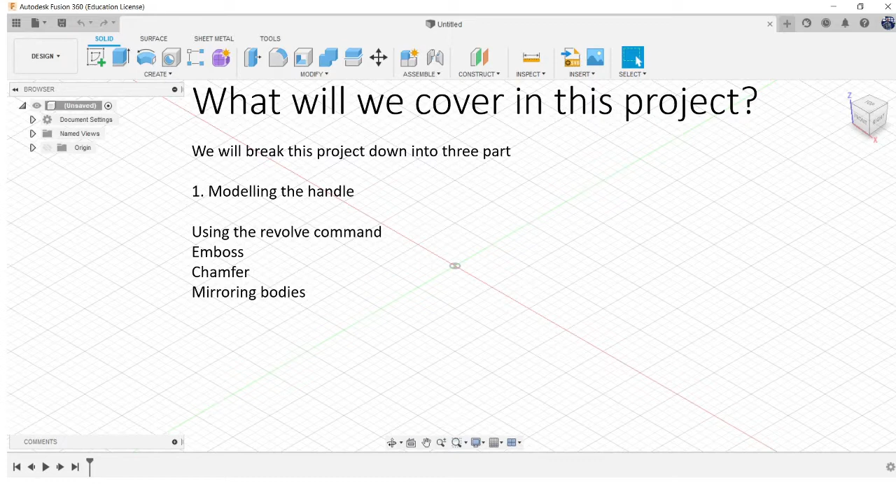reverse side. So just a nice little trick to use if there's symmetry in a model rather than modeling the whole thing over and over and over again. You can just do a little part and you can keep mirroring it over. It just makes your life a little bit easier, or a lot easier actually. So that's the first part.

Second part, we'll look at modelling the actual blade. Again, we'll look at mirroring, so we'll do a quarter of it, we'll mirror it across. Then we'll look at using the pipe command. And then the last little bit, we'll look at adding material to the model, combining the models from multiple files and to make things look more realistic, do a nice little scene, those sort of things.

So just for your reference as well, these are the reference images I'll be using. So the one in the middle is the canvas that I'll bring in. It's just taken off Google. So yeah, if you don't know, it's the Master Sword from a game series called The Legend of Zelda. The same theory behind modelling this would work for any other reference image you get.

Do spend time looking for a good reference image. It makes your life a lot easier. This even had measurements on it, which is like perfect. And then the other images are just there, so when I start to make it 3D, I can start to look at how really it should be looking as well.

Okay, so the first thing we're going to do is we're going to insert a canvas for our reference. Go to insert, and we're going to go to canvas, insert from computer, and I should have saved. Well, that's from a previous project. So sword modeling, and this reference image here.

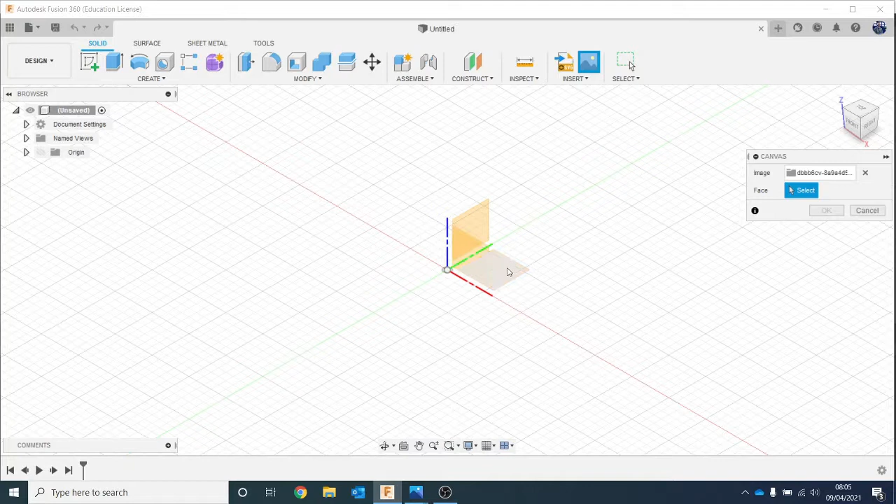Now it's up to you which plane you put it on. I find putting it on the front one is a little bit easier in terms of the camera. I did do this before and I did it on the bottom plane and it just made the camera a little bit more difficult to control. So I'm going to click on here and then hit OK.

And then what we want to make sure we do as well is just make sure, so we go to canvases on the left hand side, right click and calibrate. I'm going to zoom in. Now thankfully I found quite a good reference image that tells me the size it needs to be. So I'm going to click on the top, click on the bottom there, and you see it should be 3. And now it's back to front.

So actually, let's just do one thing first, let's escape that. Let's just edit feature. There we go. So flip it round. Now let's calibrate it just so we can read it. So calibrate. Let's click on the top and then the bottom, and it says clearly there. So this is in inches. So we're working in millimeters, but you can still put inches in.

So we'll do 5 and 1/8 inch, and you'll see that it's calibrated it, but it's done it in inches, even though we are in millimeters. So if you're in millimeters, just type in IN, or if you're in inches and then you type in mm or cm, it'll convert it for you anyway. Okay, so let's have a look.

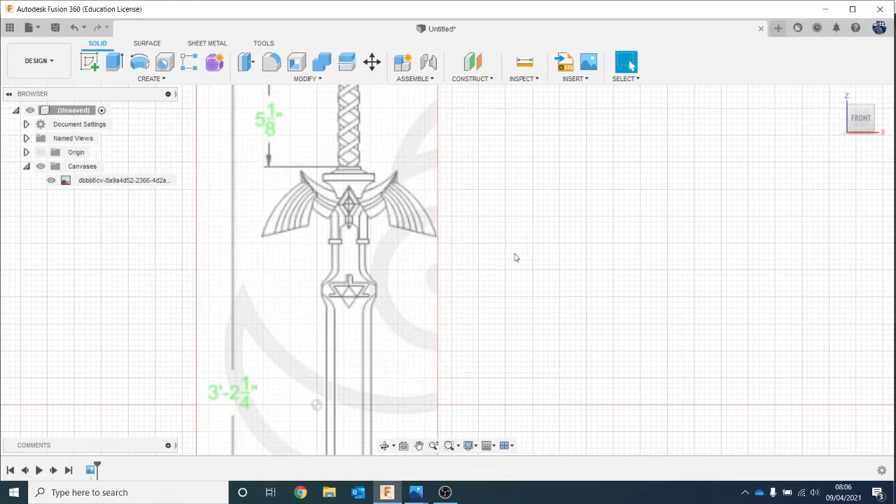So we're going to start with doing the handle first. So let's start by doing a sketch and pick this plane. I'm going to zoom in, and really what we're going to do, I think we're going to do a revolve for this first part of the handle, and then we'll end up modelling a quarter of the hilt to then protect a bit of the sword, and then we'll mirror them over.

So let's go on line. So L for line, I'll go to create a line. I'm going to go halfway, and let's bring it down to here.

Now it looks like it wasn't quite right, so I'm going to double click, move. I'm trying to make it in line with this little bit here. There we go. So that looks like that's much more in line.

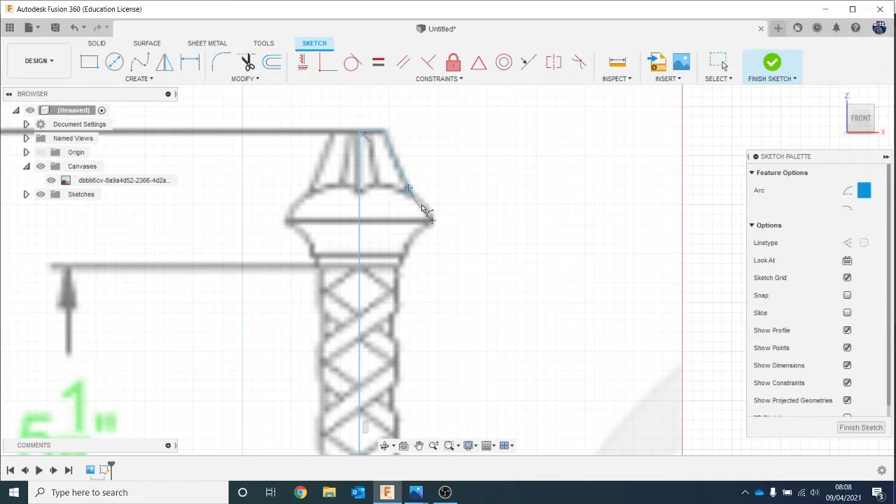Okay. And then what I'm going to do is basically use the line tool again and sort of trace over where it is. Now for this little bit here, I'll use the arc command, so I'll press escape. I'll go to create and arc, 3-point arc, so I'll click here and here, and then like that, and then I'll do the same. I'll do arc here, so I'll click here and just sort of adjust it like that. Maybe I'll add a little fillet so it's not very sharp.

Okay. Then we'll go back to the line command. So L on my keyboard. Let's come in a little bit. Now, obviously, the more you zoom in, you can end up making your reference image quite blurry, but we found a quite good detailed reference image, so it's worth spending the time trying to find as detailed a one as you can, because it makes your life a lot easier when you need to trace over things.

So there's a lot of zooming. This is why it's good to have a decent mouse as well with a scroll wheel. Okay, we'll go back to the arc command. Let's go to create an arc. Annoyingly, there's no keyboard shortcut for arc. At this point, that, and then we'll just finish it off. Go to line, come straight across here,

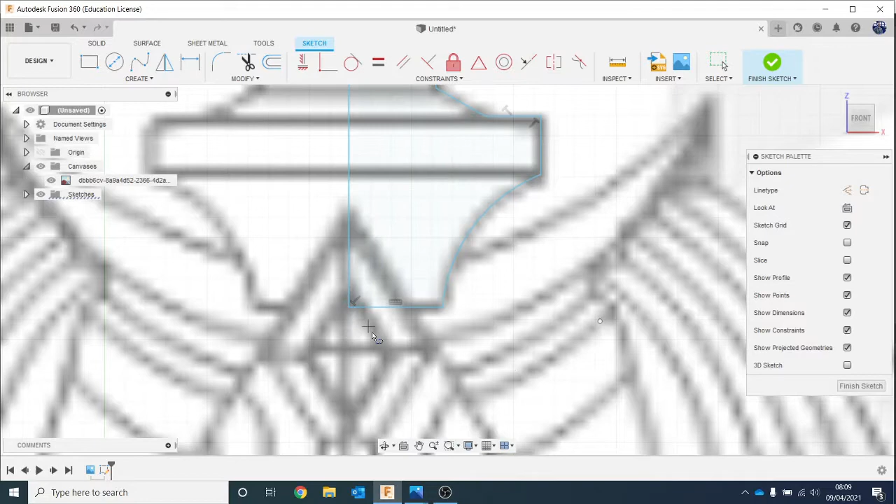like that, and then when you click over it, it should go completely blue, because that means it is a closed profile. If it doesn't do that, it means there's a little hole somewhere in your profile. So we're going to go to finish sketch, go to revolve there, or you can go to create and revolve, and it should automatically select the profile you want. If it doesn't, click it. Then the axis is that middle line that we did, like that, and hit OK. So you can see if I turn my canvas off, we've already started to get the basics of our handle done. So put our canvas back on.

So now let's just flip this around, so we're working it this way around. Again, we're going to start a sketch. In fact, before we do that, we're looking at it from this side, and we want to start a sketch right in the middle. So just to make our lives a little bit easier, I'm going to go on construct and then go on tangent plane. I'm going to click on this side. Okay, so I've made a tangent plane there. I'm going to do the same on this side. Tangent plane.

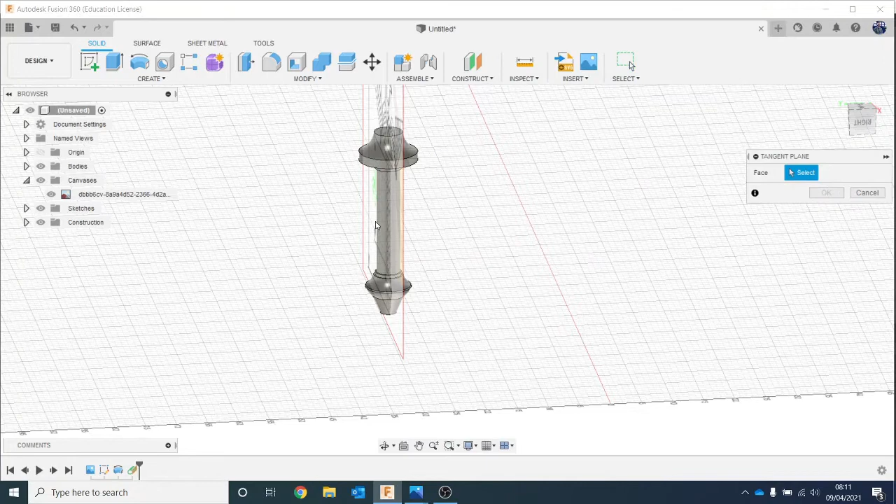Like that. And then I can just click on a mid plane, so I'm now going to be right in the middle. I'm going to go to mid plane, click on that plane, click on this plane here, and now I've got a plane that's going straight through the middle, so I can get rid of this one. I'm clicking on it and pressing V on my keyboard, and the only reason I did that was just so I know I've got this plane that I can draw on perfectly that's right in the middle.

Okay, so I'm going to go on create sketch, select that plane, and the same sort of thing. I'm just going to go around and try and trace the outline. I'm only going to go up to this part here first of all, and I'm only really going to do this left hand half because we're going to mirror it over, and then we'll mirror it on the back as well. So we're actually only really going to do like a quarter of the work. Okay, so I'm going to hit L on my keyboard. It doesn't really matter where we start. So let's start from here and let's come up.

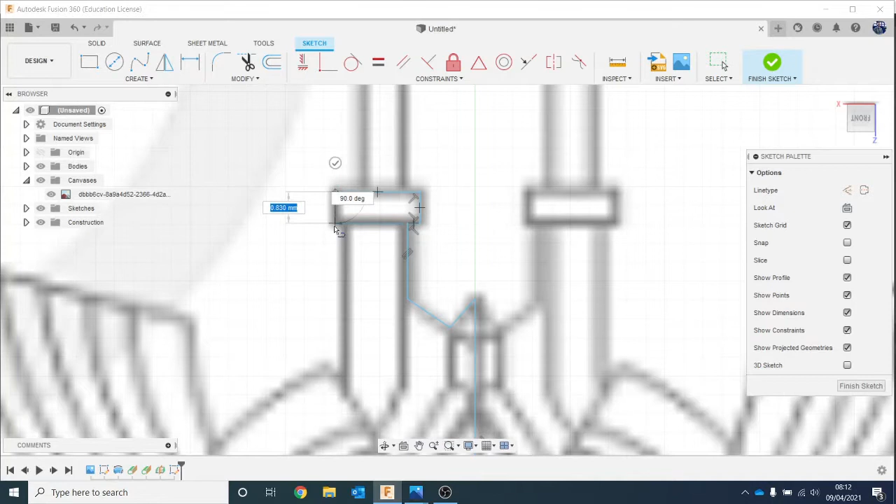And all we're doing is just going around tracing the reference image as accurately as we can. If you don't match it up perfectly, it doesn't matter, obviously, because you're just using that as a reference. You may end up changing it slightly if you want to as well. That's absolutely fine.

So we've got those bits done. So now I think we're going to have quite a bit of using the arc command here. So let's go to create and arc. Let's do there to there.

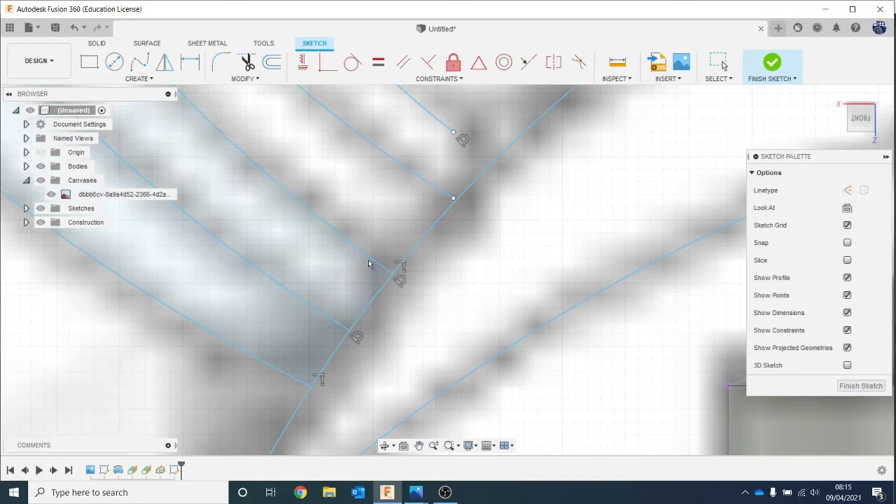And you can see it's become a closed profile now because once I click on it, it will start to do that, whereas these ones aren't at the minute. So I'm going to go back to extend and just work my way around. Those are all now closed profiles. This one isn't yet. Let's extend that as well. Let's go to create, or no, modify and extend.

Okay, and then we'll do the last few. So to create arc. I'll just finish off the line command. I should now have, just double check everything that I've done is now a closed profile. Looks like it is.

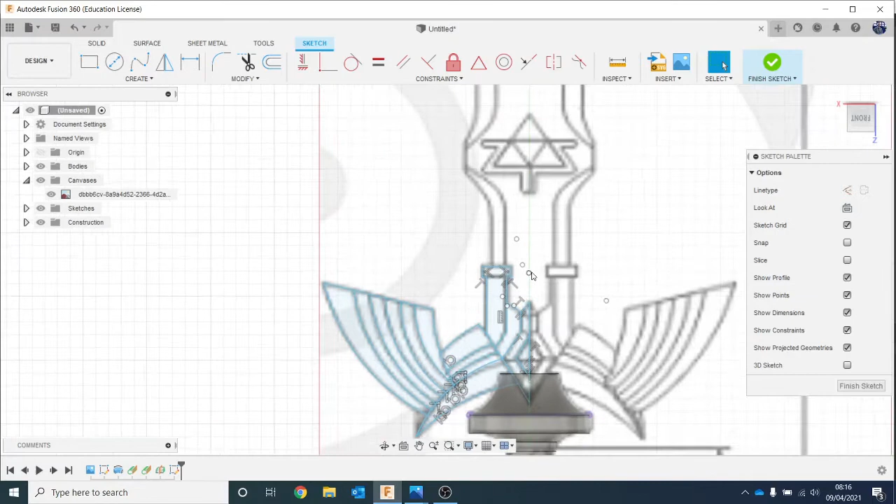Okay, so now we're going to have a go. Not finished yet. I'm sort of extruding those up to make it look realistic. So I've got a few of the reference images. So we've got the canvas that we've got in, so you can see what it's meant to look like there. But I've also got a few reference images here, so I can look in a bit more detail of how they'll end up looking. So we've got that one, and then we've got the whole thing there. So what we're going to do,

okay, is we're going to go E for extrude. I'm going to click on this side, and then I'm going to click on the side and start to drag it up and see about where I reckon it should be. So I'm going to extend it out a little bit, and I'm going to go to symmetric. It does the same on both sides. But no, I don't want it to be symmetric because I'm going to mirror it. So I'm going to do one side. I want it to protrude a little bit beyond this part of the handle, just so it has a little bit more protection.

Okay, and we'll just, like that. And so no new body. Go okay. And we're going to do the same for all of them. So we're going to click E. Oh, so our sketch has just disappeared. So we're going to go to the left-hand side, to sketches. Click this one here. Click on E. Click on this profile. Now we could drag it up again, or we could just click on this surface and

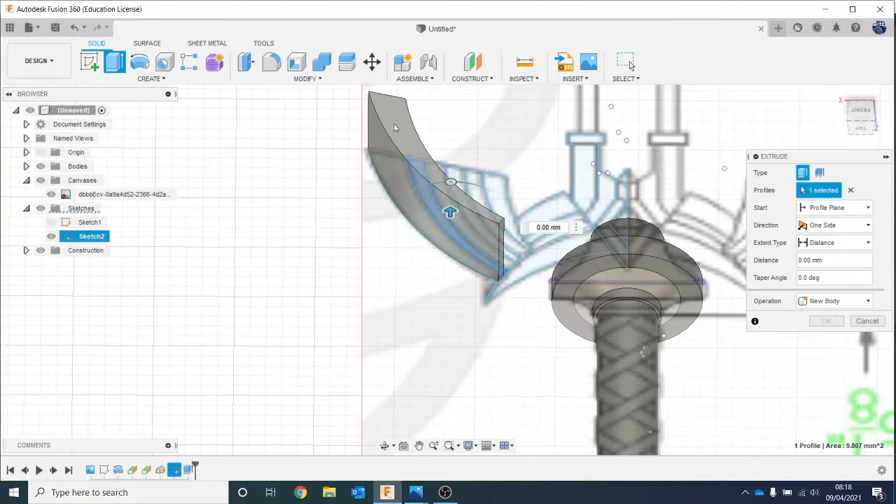it'll jump it up. But you've got to remember it's going to try and join it. We don't want it to join yet. We will join them together, but not yet. We're going to do a new body. And you can see it's a new body now because there's a line in between the two of them. And that's what we want, because we will join them together, but we want to add a chamfer and things to it before we do that.

Same again, E for extrude, bring it up, new body. Same again, E for extrude, click on that height, new body, and just do the same thing for all of these little profiles. I'm just going to keep looking back at my reference image here just to see how it should look.

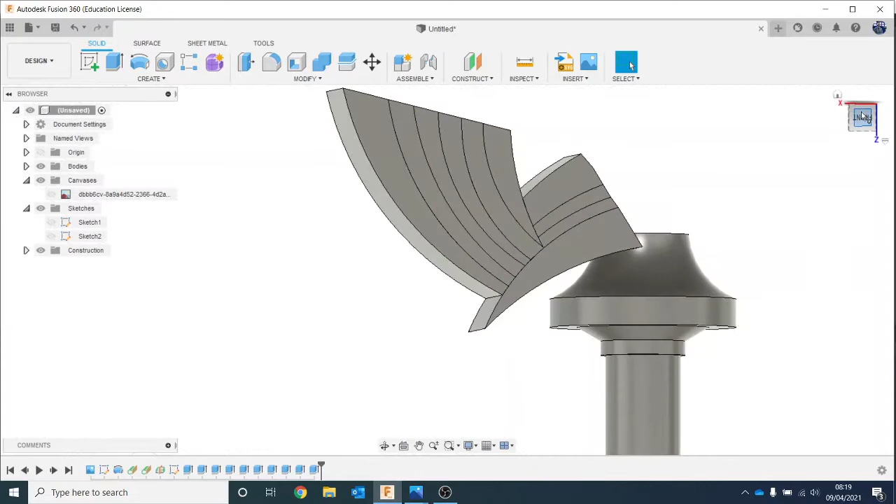Okay, so I'm just going to turn my canvas off a second so you see sort of what we've done. So we've extruded it up a little bit. So obviously that's not the shape it is, that's the overall outline, but if you look at those images, we've got a little bit more like a chamfered edge to them, so that's what we're going to add to it, which is why we didn't join in the first place. So we'll go to modify and chamfer, look at this edge and drag it in a little bit.

Control, click on the same side here. Let's bring it back a little bit. Like that. Click OK. And let's do the same on these other pieces as well. So let's go to modify and chamfer. Oh, I clicked the wrong part. Let's go to modify chamfer.

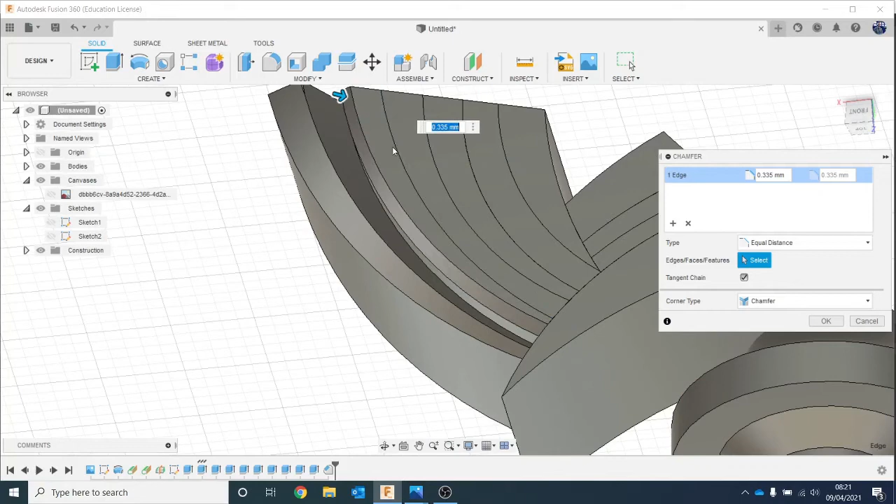So this edge, this edge. That's not the edge I meant to click. There we go. Drag it in a little bit. Click OK. See how it's starting to look. Quite nice. Same again. Modify, chamfer.

Okay. Last couple. So what I'm doing is trying to select. So there's two edges there. I'm just holding down with my mouse so that I can pick through, and it's normally the second one. But that might not always be the case. So in that instance, it wasn't the case. So we'll cancel that. We'll try it again.

We'll go to modify, chamfer, and that edge. Go with that edge. Okay, so I had the surface selected there as well. So let's try that again. Let's modify, chamfer. So I just want that edge. This edge. There we go. That's the right one.

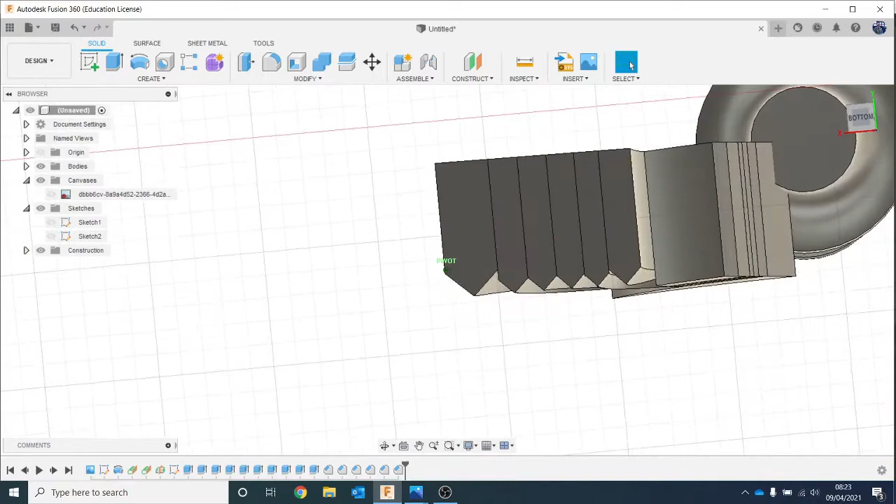So then I'm going to add some chamfers to these parts as well. So we look back at this reference image. We'll add some chamfers along here. So let's have a look at doing that. So let's go to modify chamfer. Okay, I might have gone a little bit too far. Let's have a look. Yeah, that's probably a little bit too far. So let's not select that surface first.

Let's go to modify chamfer. Let's just do this side first. Let's leave it like that. I think probably fine. Yeah, that looks better that way, I think. Then let's just chamfer these parts. Oh, wrong edge.

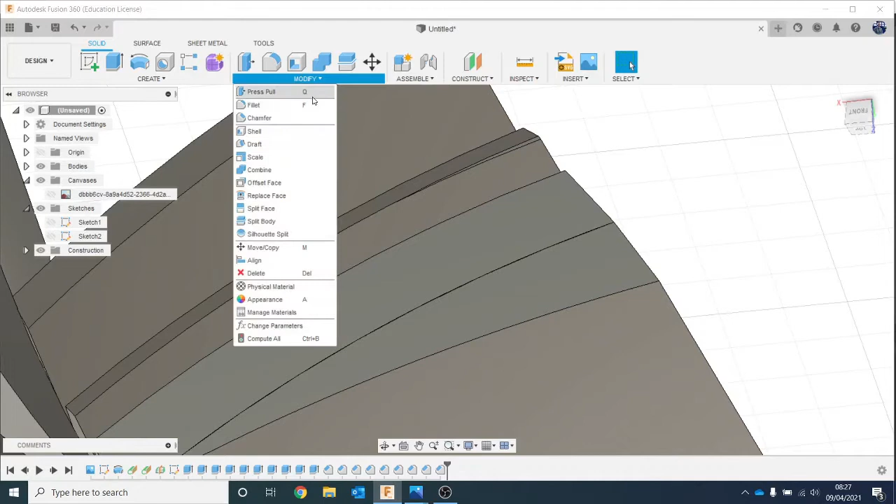No, don't want my surface. Want that edge. Oh, wrong edge. Can be a little bit fiddly sometimes to make sure you get the right edge selected. Come on. There we go.

And then the last little one, we'll chamfer this bit here. Right in. Like that. Okay. So we have a look and see how it's starting to look. Quite nice. Let's compare that to the original. I'd say we're not far away.

Okay, excellent. So now we'll start having a look at the little bit here in the middle. So let's have a little look at that. I'll put our canvas back on. So yeah, we'll put our sketch back on as well, because we've already got that, so we can start on these little bits as well. So let's have a look.

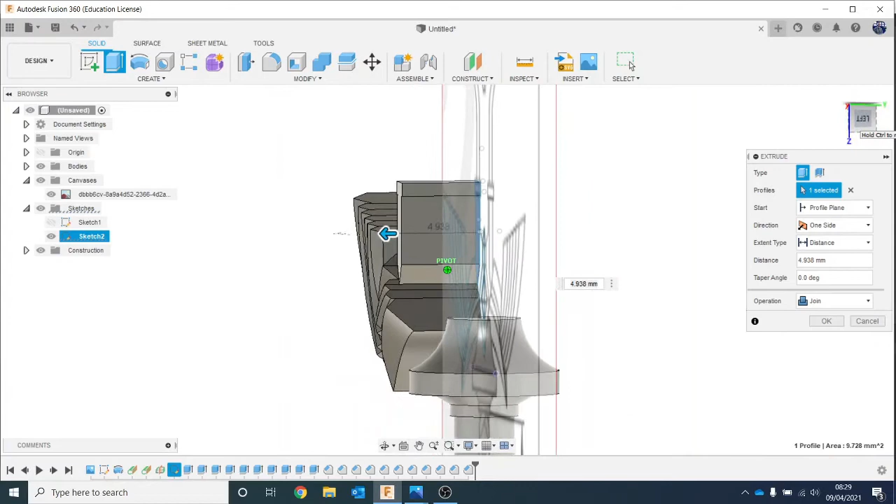Okay, so let's select profile, E for extrude. And then let's bring it forward a little bit. Bring it to about that height. Okay. And then let's do the same for the other profiles. So bring it up to there. I'm going to change it to new body. Again, new body. E up there, and then new body.

Okay, perfect. So let's turn off our canvas so we see what we're doing. So same sort of thing as before. We don't need our sketch on anymore. So if we're looking at our reference image, let's see what kind of thing we're doing. So we're going to do a little bit more chamfering, and then we're going to mirror the whole thing over, I think. So let's have a look. So let's start with chamfer.

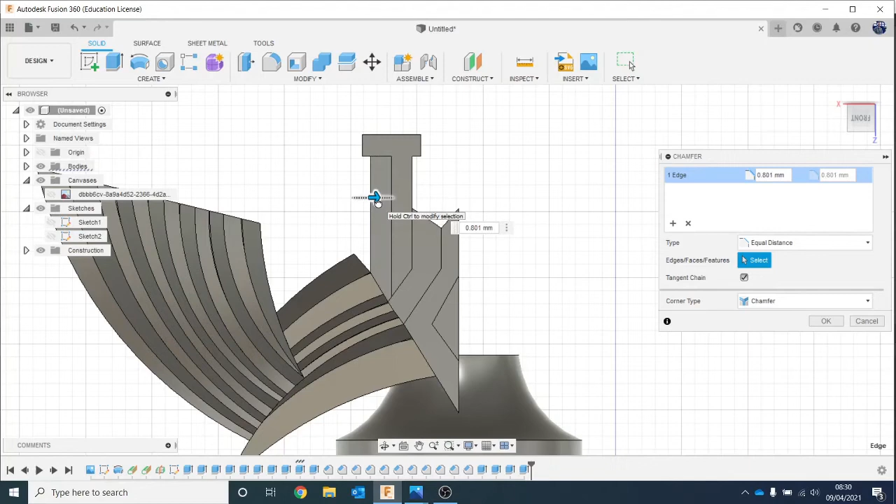I'm just going to keep flicking back and forwards towards our reference image. And we're just trying to make things look as right as possible. If you're trying to do it and it doesn't look quite right, you can always just alter it a little bit as well. Okay, let's then have a look. Go back to our reference image. Okay. Again, let's go to chamfer. Okay, so it's chamfer.

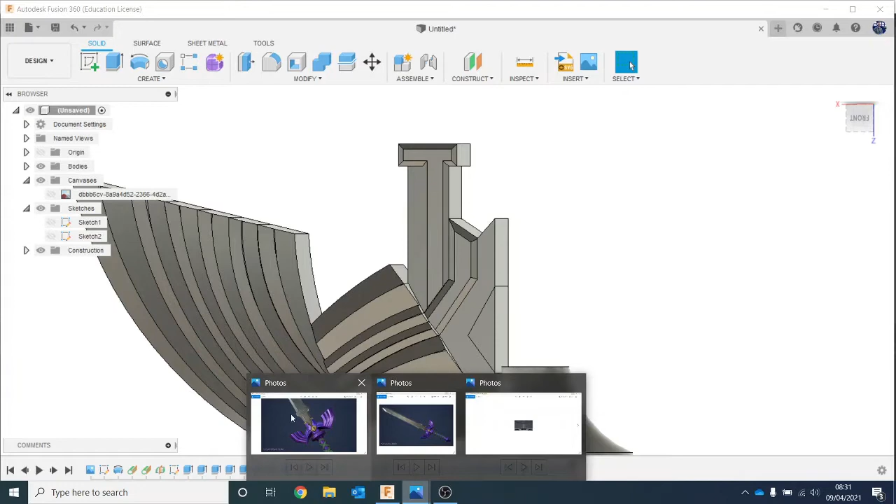Again, the last little bit I think we have left to do is just this little diamond shape in the middle. So let's just have a look how that's supposed to look. Okay, so let's do modify chamfer. Excellent. And then the last little bit we'll do in the middle. So go to modify and chamfer.

Like that. So basically, we've only done a quarter of it, so we're going to mirror it on the right and then the back as well. But that's sort of what we're after doing. So we've done quite a lot of work on this little detail. So there's quite a lot of detail to it. And we did it all as separate bodies. So now what we're going to do is we're going to combine all of these together. So let's actually just find out. So that should be our handle, I hope.

There we go. Okay. So now, as you can see here, we've got all these different bodies here, which can get a bit messy. So we're just going to combine them all together. So I'm going to select them all, go up here, go to combine. Okay, and you'll see now that they disappear. So now it's all one solid body. So then we'll have a look at mirroring it and then start to add some more details to it as well.

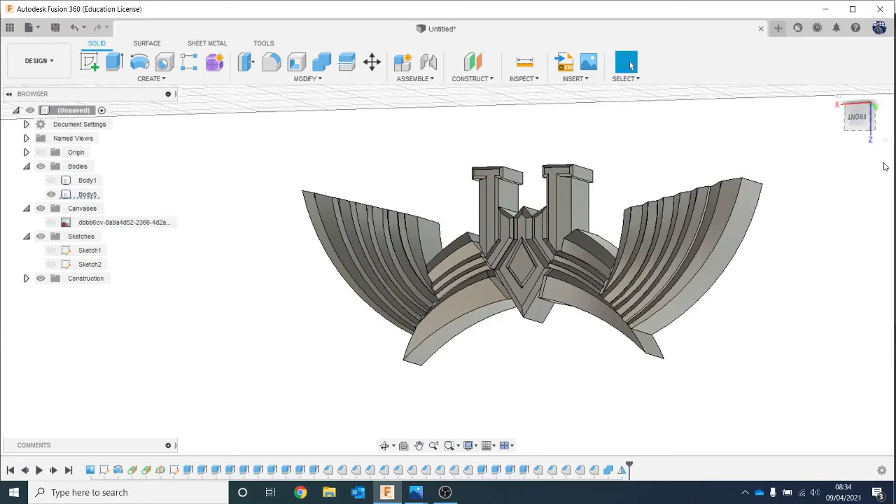Okay, so let's turn this body off here. So we've just got this one. So we're going to mirror it. So we're going to go on create and mirror. So type, we want to mirror body. So I want to mirror that body. Mirror plane, I can just rotate around and say along there. Hit OK. It can take a little bit to load, and you can see straight away already we've now got our perfect left and right.

Now obviously we want to do the same on the other side. So we'll do the same. We'll go to create and mirror bodies, mirror plane. Because it's a flat edge, we know we can just do it that side there. Hit join, hit OK. We've now got our top bit. So we spent quite a lot of time just doing 1/4 of it, but then it was nice and easy because then we could just mirror it all across. And then we've got our handle that goes straight down the middle, nice and proportioned that way.

So let's just combine all that together. So let's go to combine this body and this body. Hit OK. So we're not far off to having the handle done, which is definitely the most detailed part of what we need to do. So if we have a look at our reference image, there's this sort of lattice pattern going along the handle, and it was on our reference canvas as well. So we're going to do that with Emboss.

So just quickly, I did this before and then I didn't try it to see if it works. I thought of a new idea of doing it. So I'm going to go to inspect and measure, just out of curiosity. Okay, so what I've done is here, I've gone to inspect and measure to try and get basically the circumference of it. So I'm going to just try and see if this works. Right here, loop length, I'm going to click to copy to clipboard.

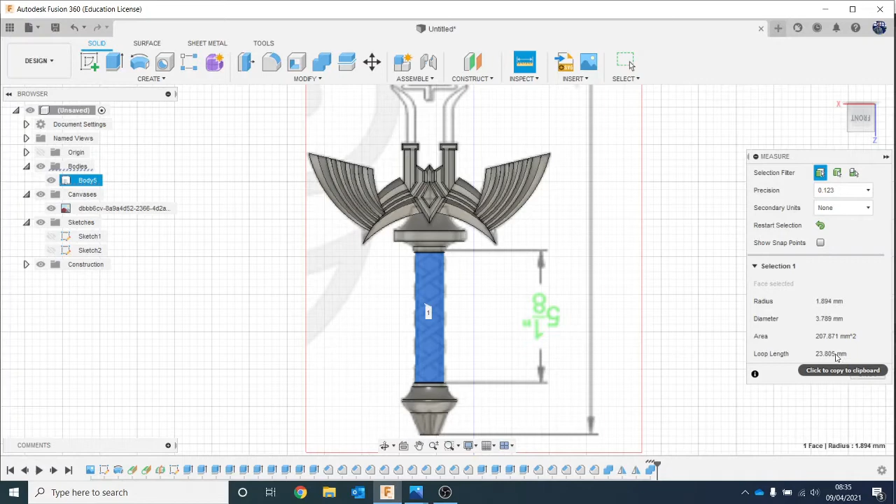I'm just going to click on that and close, because now I'm going to click on sketch, and I'm going to click on this plane, and I'm going to rotate around, and then I'm going to start sketch, like that, click on D for dimension, and I'm going to paste in the length, because hopefully that means it will wrap around. You'll see what I'm going to try and do in a second. Okay, so that's the length. That may not work, so we're trying it out to see. Just maybe a slightly better way of doing it.

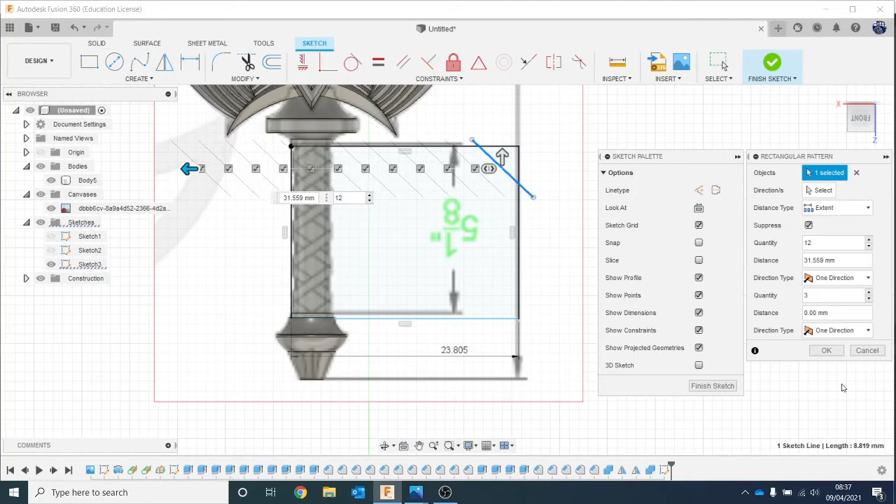So what I'm going to do now is basically try and just do like a freehand lattice type pattern. I'm going to line. I'm going to start coming across like that, and then I think what I'll probably do is go to create. Let's go to rectangular pattern, and let's put those numbers. Let's try like 10. I'll extend it outwards. Do a few more. 12. Okay, and I'm going to use our extend command that we used before, just to extend it so it goes to complete that whole profile.

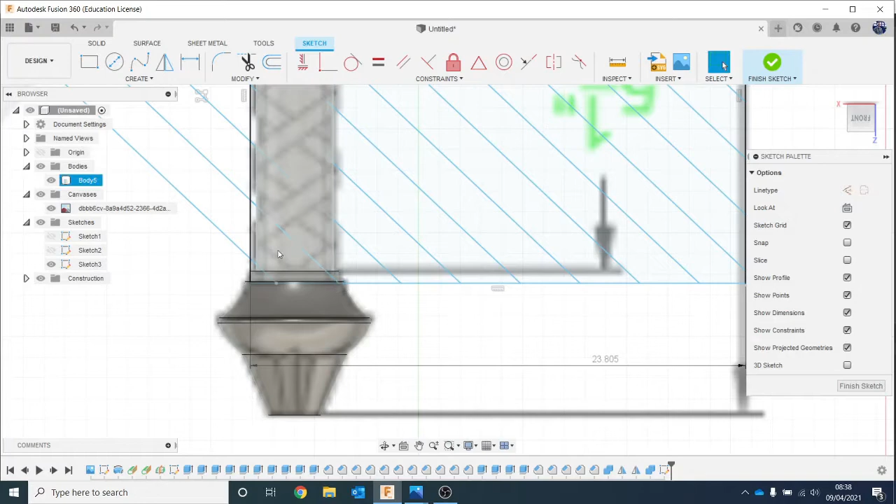Okay, I think maybe let's add in one more extra line. So let's see if I can go back and let's try create rectangle pattern. Just drag it once more there, so okay. Hide this body a second. Okay, so now I can see I got this profile. I don't want that line, so let's just delete that bit. Okay, so I've now got all those profiles along there.

Now we'll have them going the opposite way. So let's see if this works. Let's select all of these. I'm going to hold down Shift, select all of these. Just the lines, not the profiles for now. And I'm going to do Control C, Control V. Then let's rotate them 90 degrees. Bring them down. Okay, and then I'm going to do the same thing. I'm going to extend these a little bit. So now you can see I'm getting these little patterns that I was after. So I'm going to modify, extend.

So it seems like we're doing quite a lot of legwork to try and get this pattern equal, but I think it probably just makes it a lot easier than if we were to try and freehand it, so we know it's all going to line up. And hopefully the thing I did before with the measuring has worked well, otherwise I'll cry. Let's give it a go.

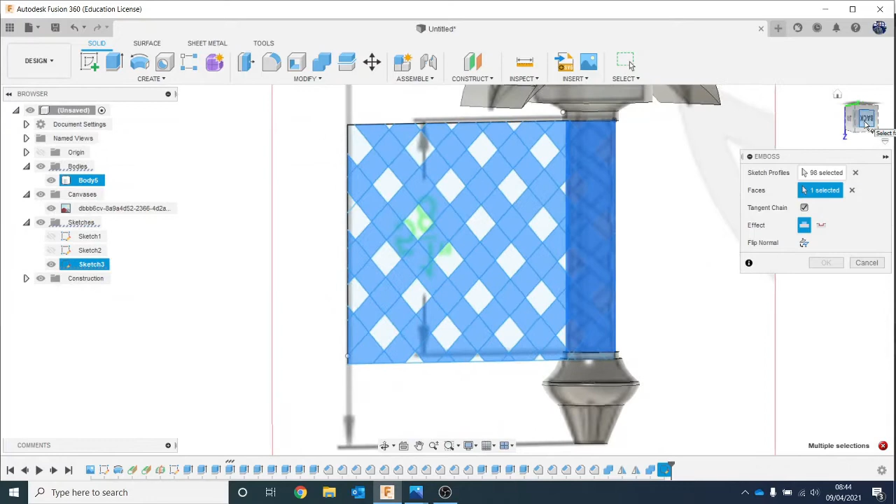Okay, so what it's saying there is the error, because that's what I was trying to avoid, because last time I did it, that's what happened as well. But it's not a big thing. So if I look at this error here, the sketch profiles create intersecting body. Basically, it's saying that this bit is too long to wrap around, which is what I was trying to avoid, but it's not a big thing. Basically, we're going to do a little bit of trial and error now. So let's go to edit sketch, and I'll do it shorter first, just so you can see what I'm talking about.

So I'm just going to come down here, come finish. Same again, let's try emboss. So now I'm just going to do it up to that line and see if that works. It's a little bit of trial and error. We tried it, it didn't really work. Probably should have tried it before doing the video, but the idea just came to me as I was doing it.

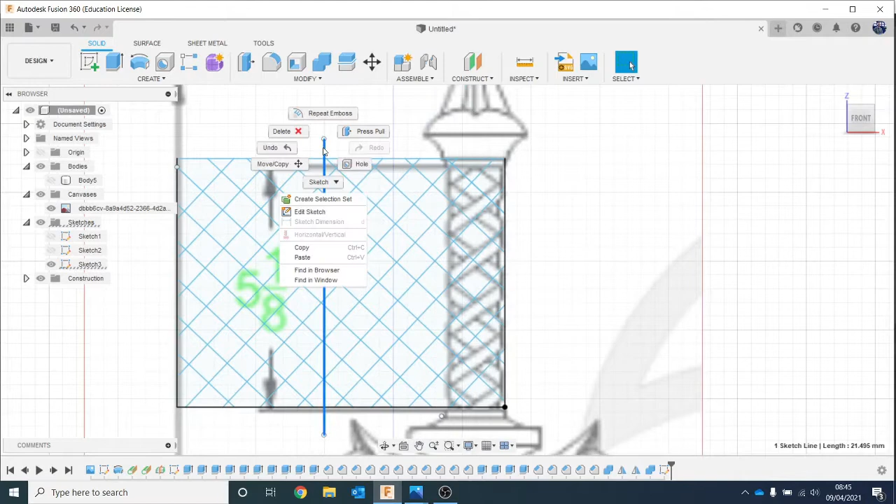Faces, body back on. Okay, still not. So let's move this way a little bit more. Let's just try that again. Oh, no, wrong profile. I don't want those ones. I want these ones.

Okay, so there you go. You can see that's wrapped around. And obviously I've got a little bit too short, so I can actually make that. So let's change this depth. Let's change it to like 0.5. Okay, so you can see it's wrapped around. It's got the effect that we've wanted. I'm going to change that a little bit less. Let's try 0.2. There you go. That's much better effect. But you can see that it doesn't match all the way up.

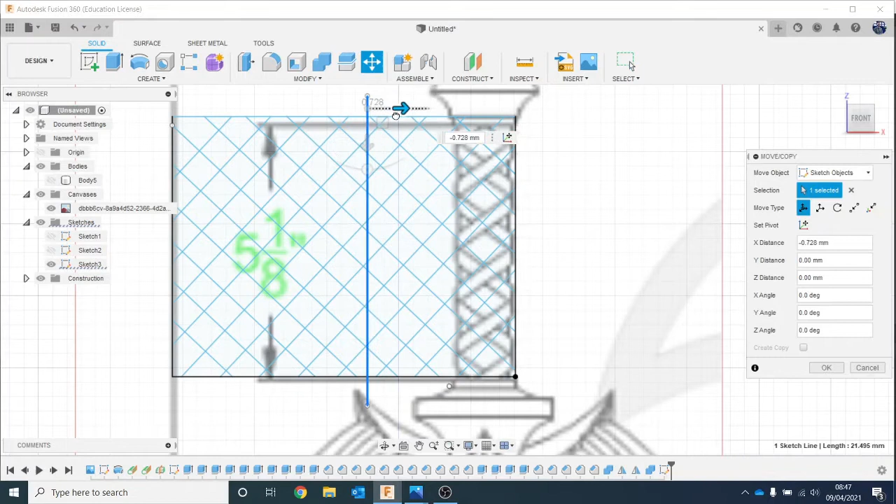So actually I can move that line a little bit this way. Let's try like that. This is probably the most time-consuming part of doing it. And it was when I did it the first time practicing as well. So once I've figured out the measurements, it'll make it a lot easier for you to follow along.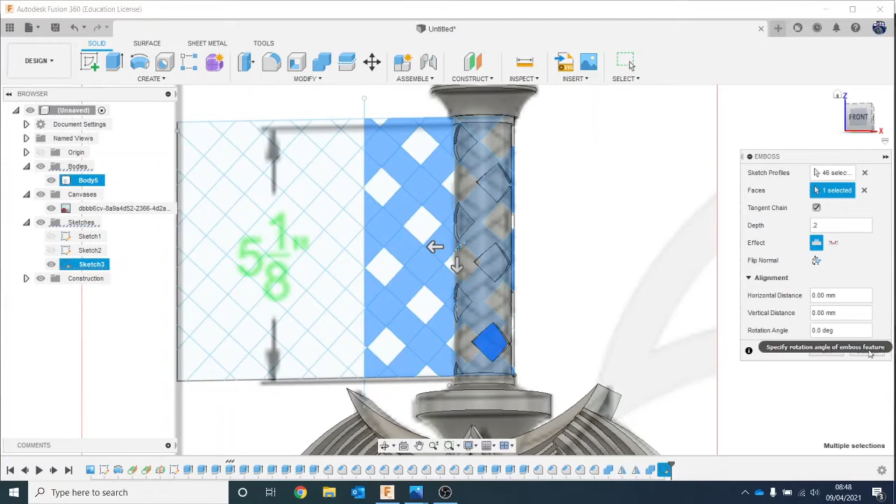I've still got a little, so you can see just a little bit of gap there, just a little bit more that we can move that across to. So let's just, hopefully, third time lucky, or whatever time we're on, 50th time lucky. Let's just move this function over like that, and then let's, one more time, we hope.

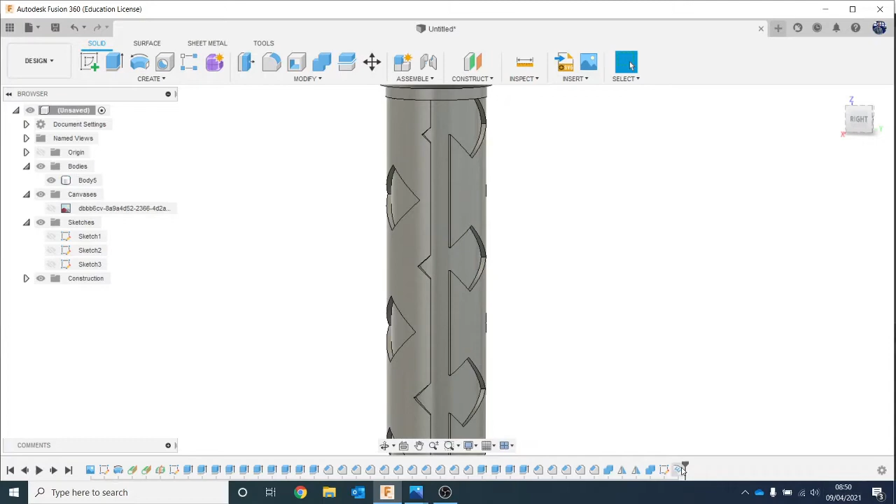Okay, let's try. You see, it's still not quite up there, so I'm going to just mess around with it a little bit longer, because I've only got a tiny little bit there, so let's just go back to edit feature. Let's just turn that sketch back on. I just need to move that over just a fraction more.

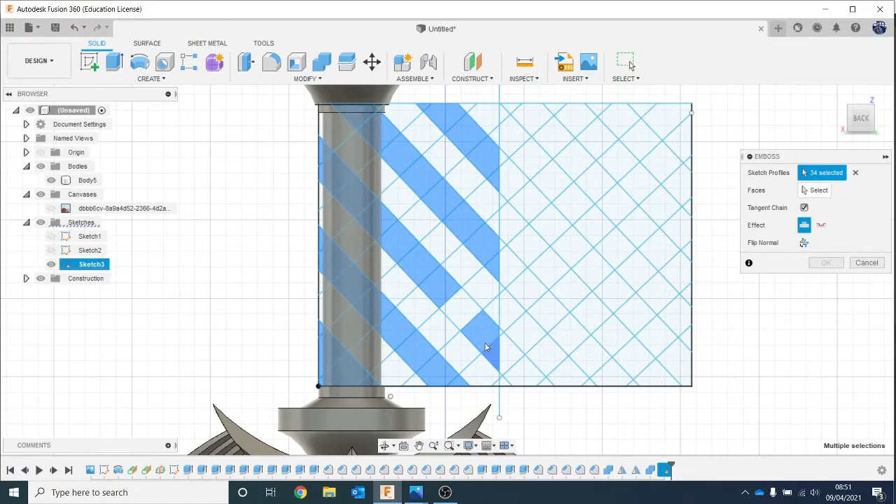Got it this time, I can feel it. Let's try it like there. This is it, this is the winning one. So create, emboss, and then profiles. And then faces.

Oh, the tiniest little bit left. Okay, we got this. This is the one, I can feel it. Come on, let's go. There, that's it. This is the one. This is definitely the one.

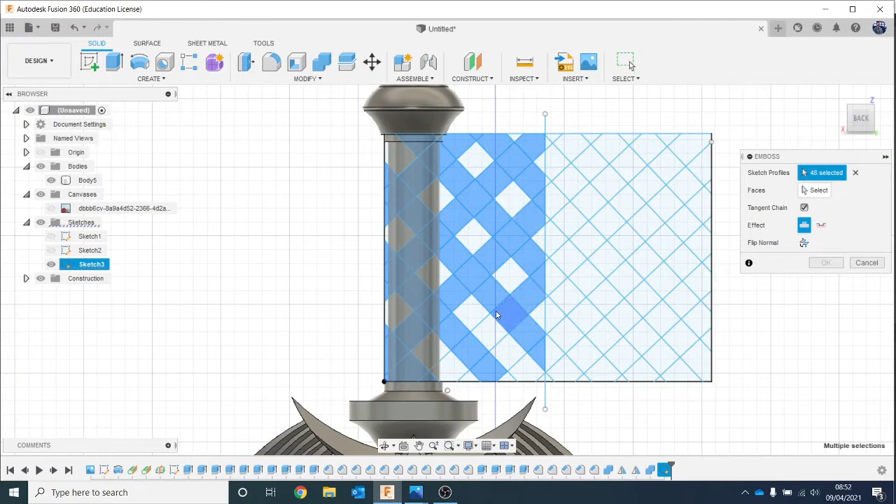Have a look. We've got the tiniest little gap there. So I won't bother going back to change that now, but you can see how you would change that just little by little. But you see, the whole point of doing that was really so we can get that little lattice design to it. So we've got our handle now finished. So what I'll do is those all combine together, so it's now one full body. So that's kind of the end of the first little part.

The next part, really, what we'll look at is doing the blade. Again, we'll do the same sort of thing, we'll do a quarter of it rather and mirror it over to the right side and then mirror it onto the back as well. I think I probably will go back and just make sure that I get my emboss perfect as well. So let's just go back over. I know it's not exactly the most exciting thing in the world to watch, but let's take this.

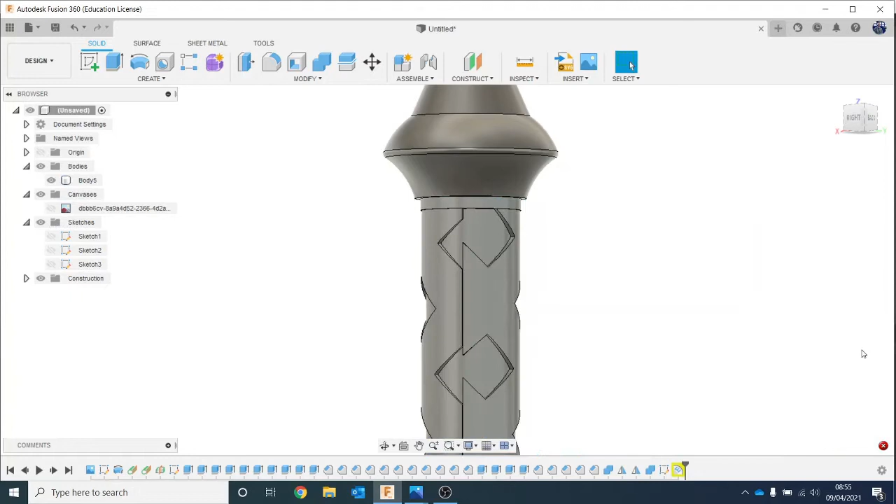I think this is close. Maybe one little bit more. Okay, so what you're seeing is the error with that. Okay, so let's go back. I need to just come inward just a little bit now. There we go. Okay, so that was the perfect amount. Spent far too long trying to sort out the grip on that, but I think it's probably worth it. It probably looks much better in my opinion. It's a nice looking sword handle.

Okay, so let's have a look at doing the blade. Let's turn our canvas back on. Okay, so let's do like we did before. We're going to create a sketch. Oh, not on whatever it thought I was going to do a sketch on. Let's create a sketch on that mid plane. Turn it this way around because I just find it easier to work that way. Let's go on line. Let's just try and find the exact top there. And let's come down into the actual body.

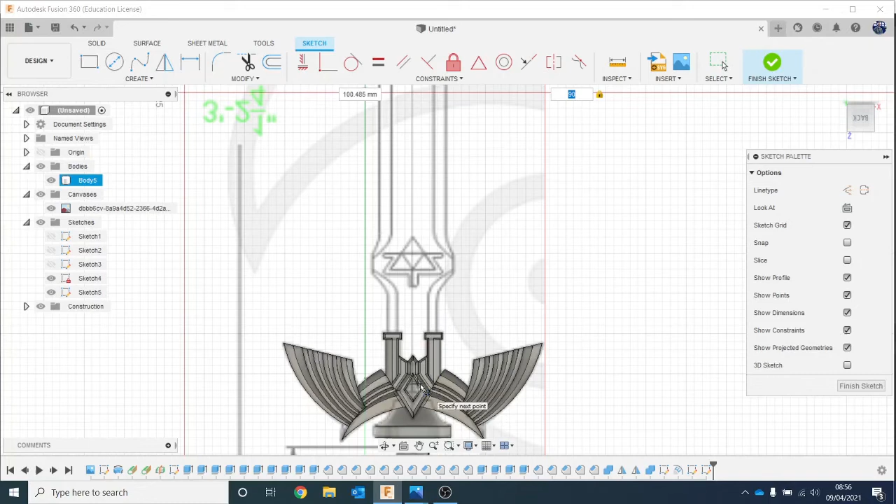I want it to be at 90 degrees exactly, so why won't it snap? That's 90. There we go. I'm just going to come into the body, it doesn't matter how far into it, like that, escape. So that's all going to be our mirror line. So now I'm going to have a go at sort of tracing one side of it, it doesn't matter which side you choose. Let's go to 3-point arc. Okay, let's go back to line.

Again, I'm just going to come into the body, it doesn't matter how far. And then let's just come down, just so I've got a closed profile. Well, I don't have closed profiles, let's just make sure I close that profile. Like that. You see, once it's intersecting the body, I've just made sure it connects up. It doesn't matter because we're not going to see that bit anyway. Okay, so now let's finish sketch.

Let's hit E for extrude, hit that profile. Let's go to the side. Pull out to whereabouts we think looks right. I'm going to go to new body again and hit OK. So you can see we've got, oh, wrong side. So you can see we've got our blade. Now I tried this before and it didn't work, so I'm going to show you. I'm going to click on Chamfer. It didn't really work.

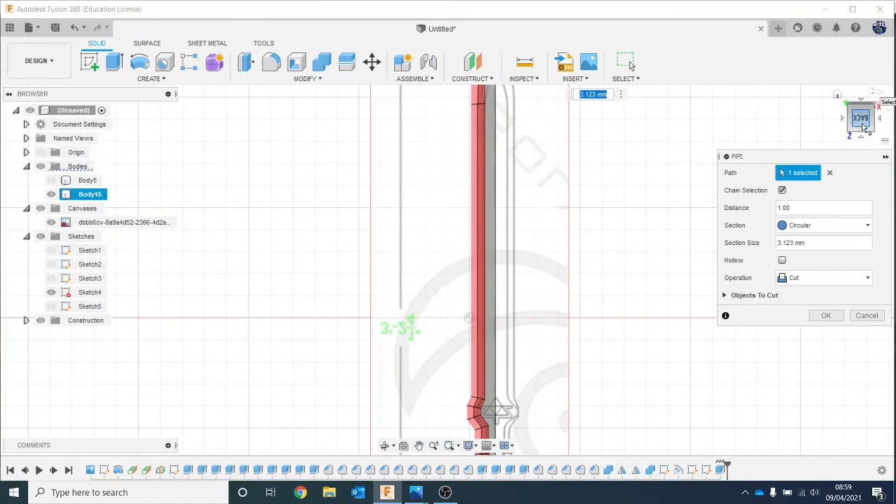So what I ended up doing instead, which I thought was quite a nice little workaround, was I used the pipe command. So I'm going to create pipe. And I'm going to click on this surface. I'm in control with my mouse. I'm going to turn off the handle body like that. And basically I'm going to use this pipe command to cut away the surface so it looks like it is sharper. Oh, that's the wrong button. Okay, let's see how that looks.

Okay, let's just mirror that and see how that looks. Let's go to create and mirror. Still on body, so body, mirror plane. I think that looks pretty good, actually. So let's leave that as it is. If I wanted to, I could always go back and change the diameter. I'll show you what I mean. So I go to edit feature and say I didn't want it to be quite as thick. So let's say like that. And then you can see now that probably looks a little bit better actually.

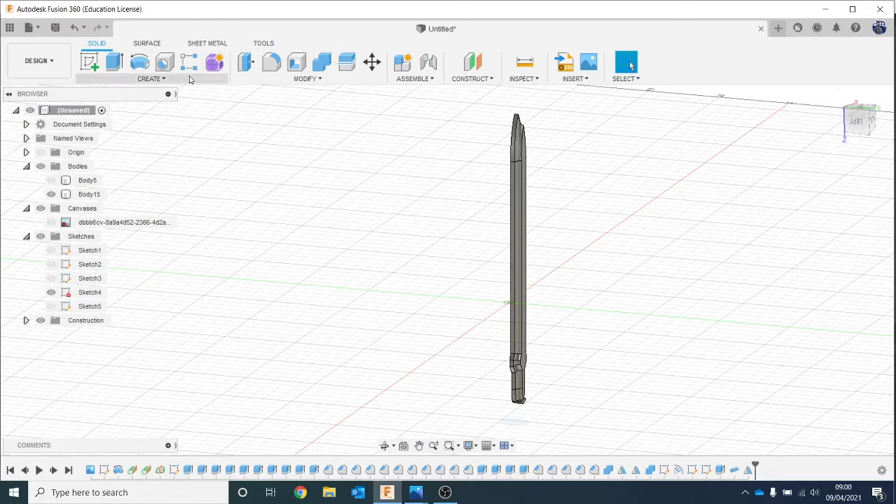Like that. Okay, so then let's mirror. Let's go to create mirror, bodies, that body, mirror plane. Now I want to do the backside there. Hit join. So we've now got our blade done. Our blade was much faster than doing our handle. So let's combine those together. Let's go to combine, that body and that body. Hit OK. So now we've got our actual sword done. So we'll just add some materials to it and then we'll look at doing a little background scenery type thing to make it look a little bit more realistic.

So let's hit A for appearances. Remember, if you can't find that, you just go to modify and down to appearances in the modify menu. So I think I went to metallic, no, I think what I did actually, I went to paint, then, see.

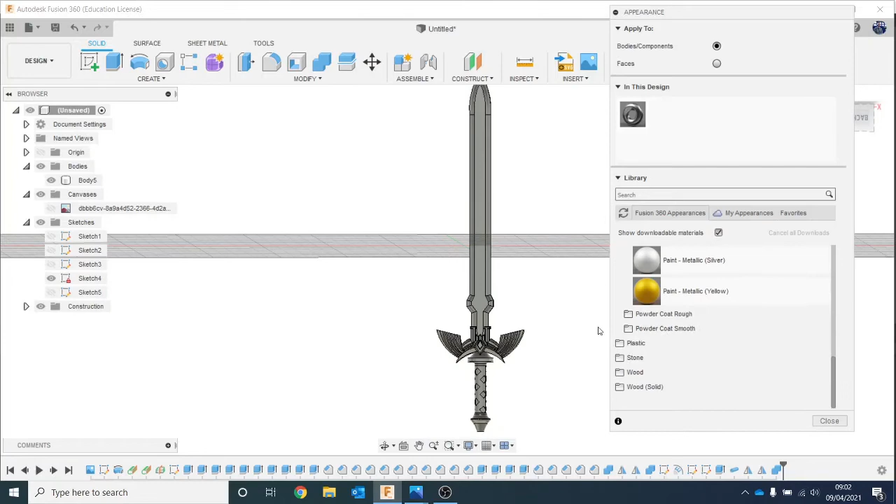So we're going to look, let's do first of all the handle, because that is that purple that takes up the most amount. So let's just grab one of these, it doesn't matter which one. Let's bring this up here. And let's try and find a purple we like. Quite darkish purple, isn't it? Try that. Drag that on. That's quite nice. How close is that? You know what? I'd say that's pretty close. Well done, me. Okay. So now let's bring in.

So the reason we did that is otherwise we'd have to do every single one of these faces, and it would have taken forever. But obviously, the whole thing doesn't need to be purple. So let's start adding a few more of the details in. Now we do have some green leather. Let's see if we can find that in there. But we've also got metallic yellow. Let's bring that in. That's what we need to do on these little diamondy bits. Yeah, so let's change it to faces.

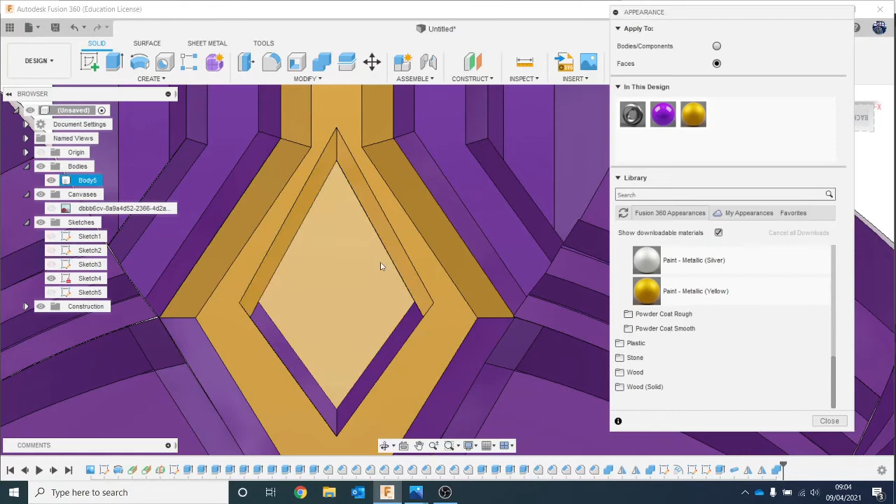We'll have to do the same on the other side as well. Just remember as well, because I've already done the bodies, I'm now on faces. So if you're trying to drag other materials or colours or paints on, and it's trying to do the whole thing, just make sure you're on faces and not bodies. Okay, let's have a look. I see it says this should be yellow as well, but let's look.

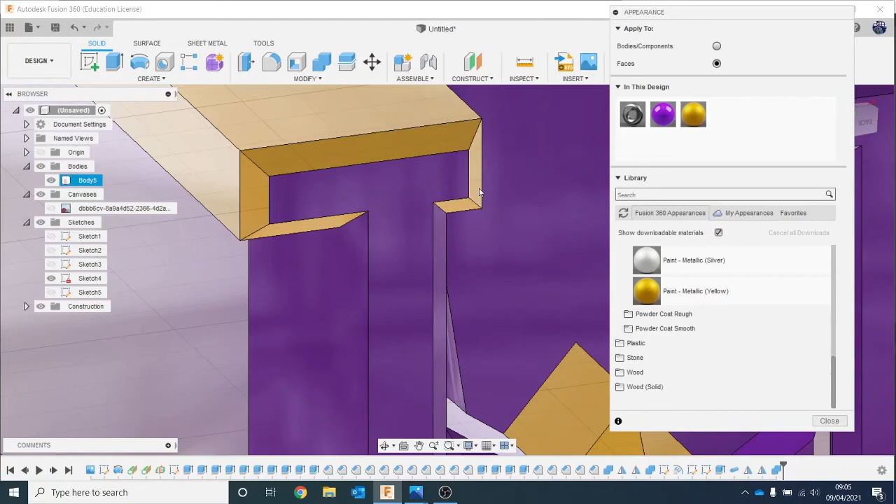Now we're going to need to split this face because along here it needs to be yellow as well. So let's just close this. Let's just create a sketch on here. I'm just going to do a line just along there. Let's just rotate around again so I see what I'm doing. So I'm going to go to modify, split face, split that face, using a tool like that. And that's just so that I can still add my yellow appearance just to that top little bit, like the reference.

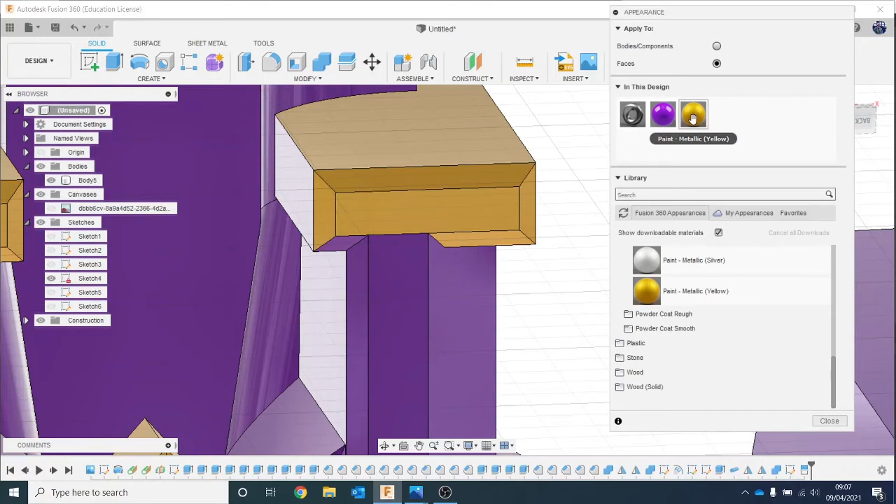But now I can, oh, actually got faces. So now I can just do that bit there. That's a nice little useful tool I've only recently discovered myself actually, because I was struggling to make just specific parts the colour I wanted. And if you do split faces, it makes it a lot easier. Okay, so it looks good.

Same on this side. Let's just turn that sketch back on. Let's do the same again. Let's go to modify, split face, select that line, turn that off now, I don't need it. Go back to appearances. Again, make sure you've got faces selected, not bodies. Otherwise it'll undo everything we've just done.

You do require a little bit of patience when you're adding materials. It's worth it because it makes it look really, really good, but it can be a little bit time consuming dragging on the materials that you need. But it's 100% worth it because it makes it look so much better. It makes it look like a finished thing.

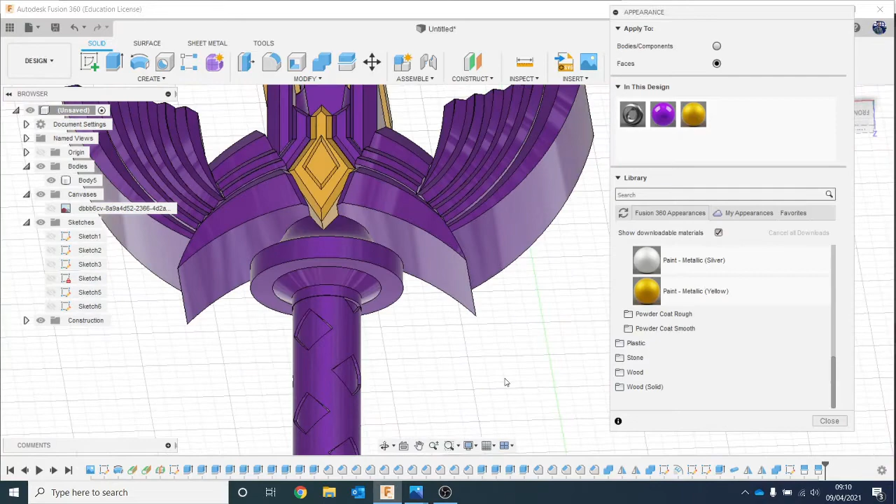Okay, so that's the yellow bit, or gold bit rather. Oh, let's do these little bits down here as well. We've got to do the same on the other side. Ooh, this bit here. Okay, so next let's have a look at. Oh, we just tested as well, didn't we?

But next we're going to have a look, try to get some nice leather for the lattice design that we've got on here. So I'm sure there is leather in here, I'm sure I've seen it before, so let's have a look. Leather and cloth, leather. Let's try that matte green, let's download. Okay, let's bring it on. Like that. Okay, that was easy.

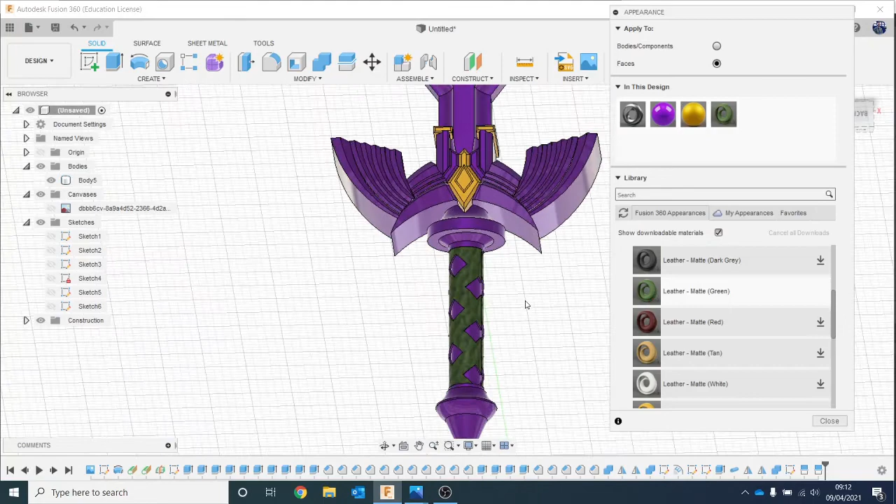And the last thing really now is to do the blade. So I think we're going to go for like a steel sort of thing, aren't we, really? It's probably the best. Let's have a look at like steel. Let's come up.

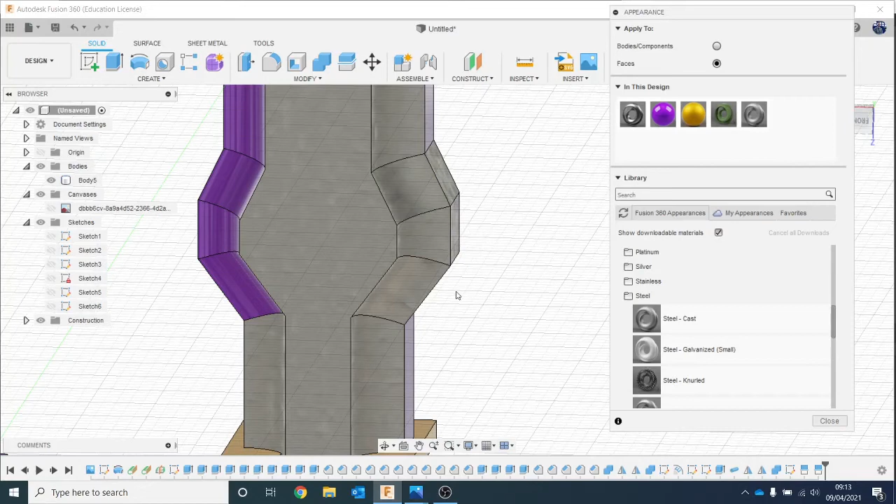And this should be the end of our sword being done, actually. So really, the most difficult part was the handle. The most time-consuming bit was trying to get that lattice done. But it wasn't difficult. It was just a bit of trial and error trying to get the right measurements, really. Okay, then we've got to rotate around to the other side.

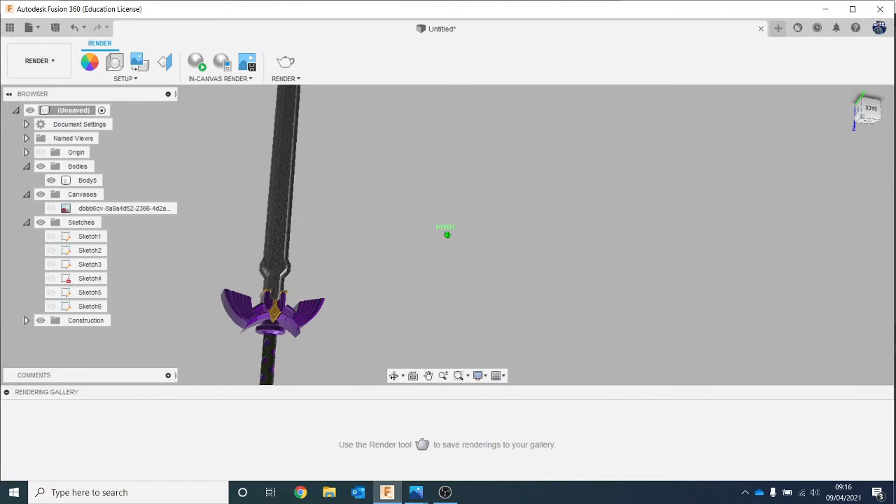Okay, and I think that is the sword finished. Let's just jump into render, see how that looks. Okay, so I'm not going to set it on cloud render in the video because that'll take too long to do.

But the last little bit, as in the other videos, we talked about having a context of putting it somewhere. For those that don't know, this is a sword from a series of games called Legend of Zelda. So this is the Master Sword. Not to show off how much of a geek I really am, but typically it's embedded in something like the Temple of Time.

So I've got a little reference image. It's kind of like a King Arthur Sword in the Stone type of thing. It's all very dramatic, but it's a lot of fun. So I may just do a quick little model of having that in there, because I don't like having things where it just floats in the middle of nothingness. I think it just looks a little bit odd, for want of a better term.

So let's just have a little play around. Let's go to offset plane. We're not going to spend too long on this. Well, we'll see how long it takes, really. But let's just have a little look. Okay.

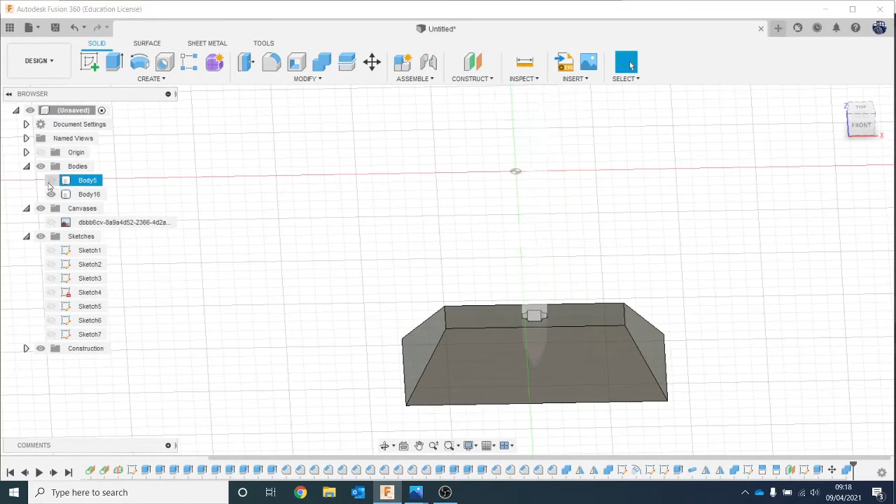which I do not want. And the whole reason of doing that, if I turn off my sword, is it's got a little hole where the sword would go, so it actually looks like it could be pulled out of it, like it's embedded in it properly. So we've got that, and then let's have a look. So it's sort of like a pedestal type of thing.

Okay, so let's sketch the bottom of this. Let's go with polygon. So before we do that, just do some construction lines, just so I know I'm going to be accurate. The whole point is just to make sure that I'm going to snap it right to the middle. I'm going to create polygon. There we go.

So you can see it's starting to build up in there. I'm not copying this exactly, I'm just trying to give it a little, oh, wrong thing. Trying to give it a little bit of context, make it look like it's not just floating in the middle of nothingness. Okay, let's do one more, so let's sketch, project that whole shape, and let's offset it. That's exactly the same. Let's do it.

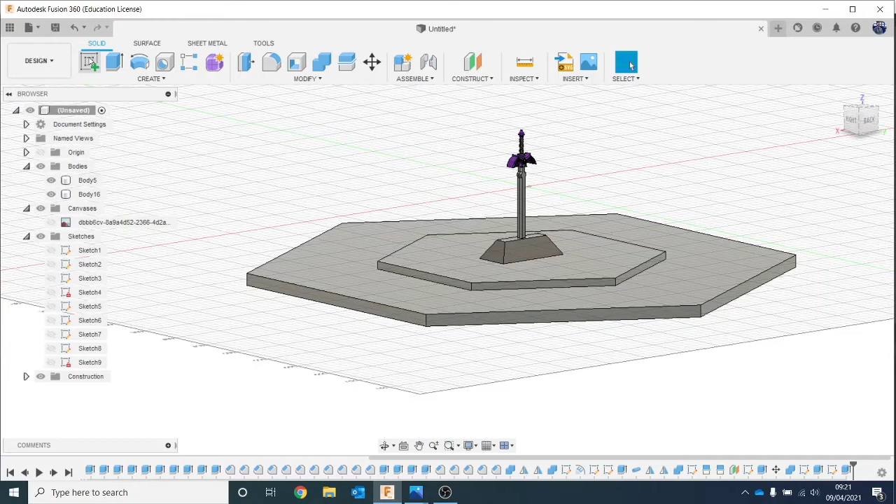And then let's just do the back walls to it. So let's sketch. And I'll probably do these side walls as well, just to make sure that it looks about right. So that's inside.

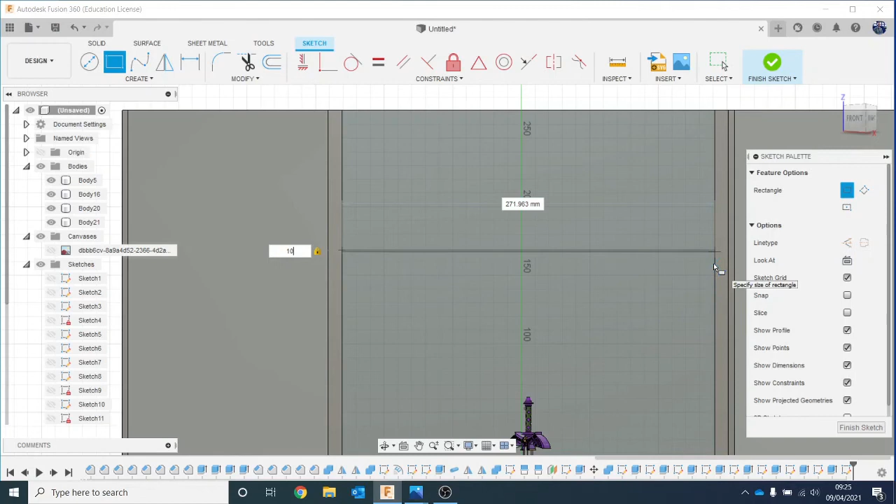Okay, and then last little bit, maybe just having one coming across all of there. Let's just do that. Let's go quick sketch. Nice little bit over here.

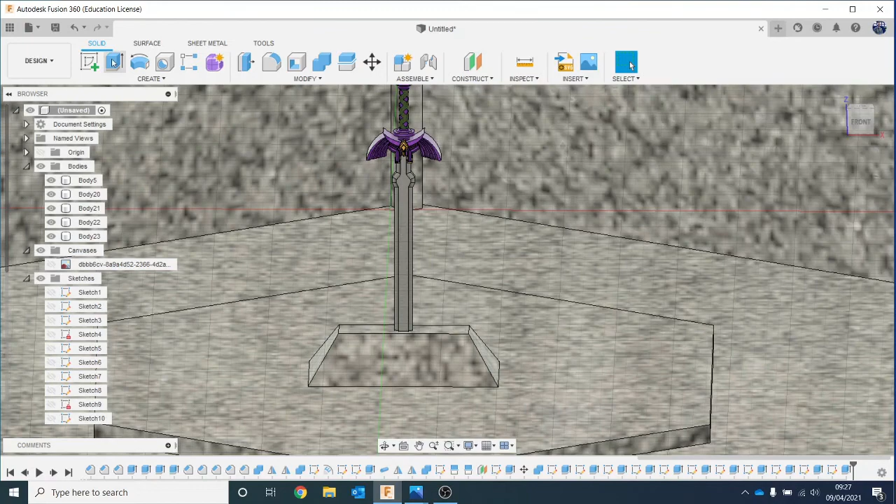Okay, so let's jump back over to render. Let's just move down a little bit. That looks better. I'm starting to think that steel doesn't look all that good. So let's just go to basic quickly to see. Okay, that looks much better actually.

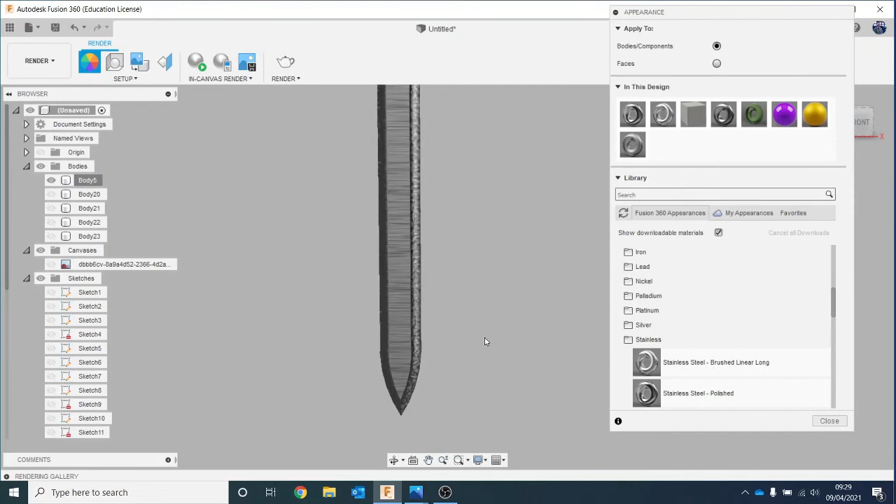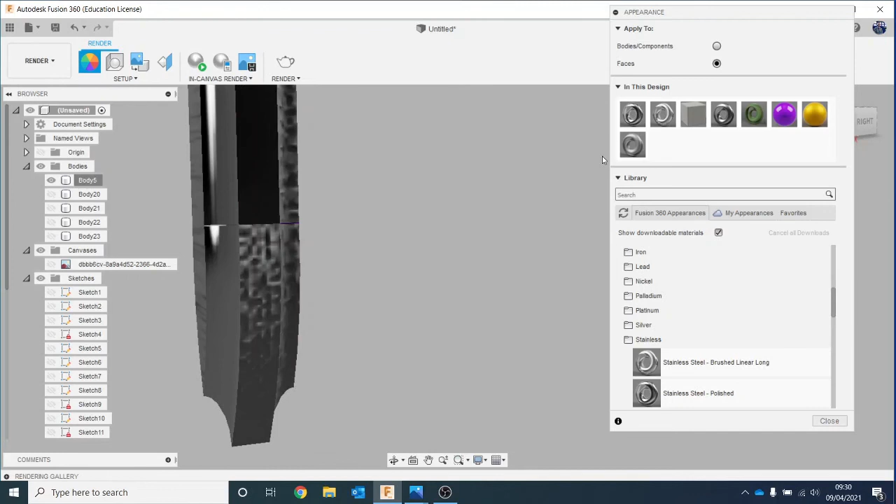So let's just really quickly. The perfectionist. Let's isolate. Right, stainless steel polished. Let's just add that. Nice and quick. That'll look much better, actually. Let's slide this left a little bit.

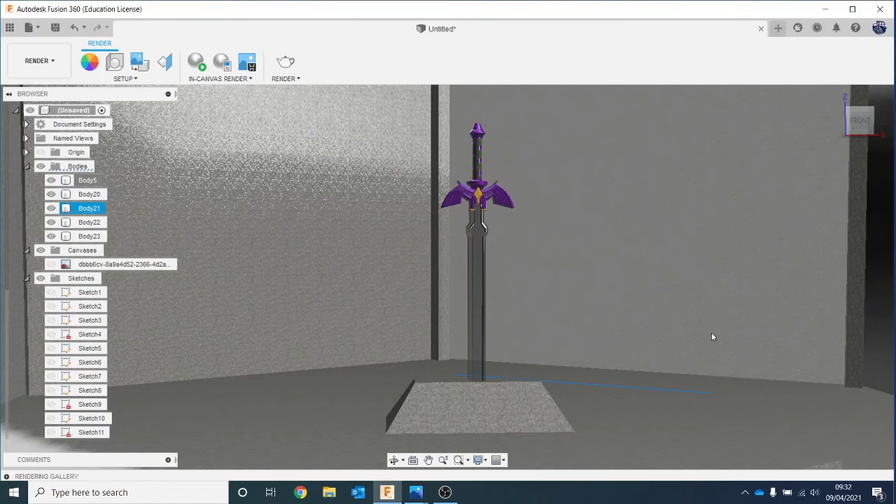Okay, so let's have a look around. Okay, so let's unisolate. Get rid of that line that we put down there for some reason. There we go. Line it up how we want it to look. And let's click on render and see how it looks.

So that's the end of the video. Oh, I never actually saved it. That was a bad idea. Okay, so yeah, that's the end of the tutorial.